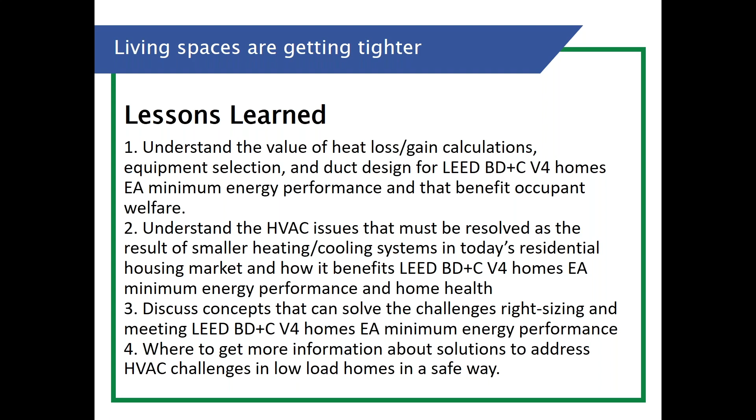I'll be your moderator. My name is Brett Little, and I am the executive director here at the nonprofit, the GreenHome Institute. And today we're going to be talking about how spaces are getting tighter and tighter and more efficient as codes progress, and how our HVAC sizing systems need to move along with that.

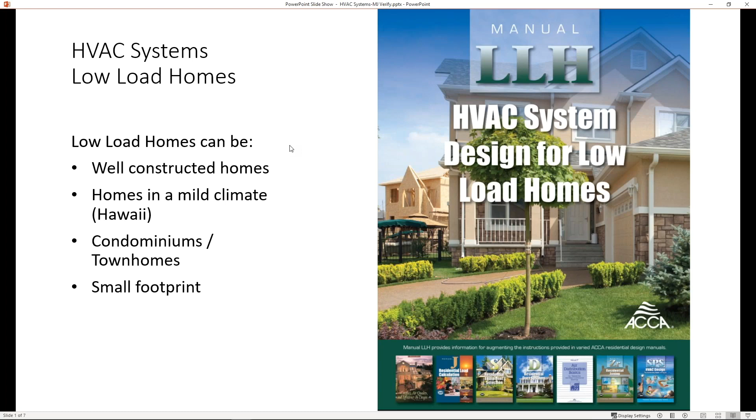How much insulation's in the house, and does it contribute to a tight dwelling or not? Same thing for the walls, doors, appliances, how many occupants are in the home. A lot of people model their homes with lots of occupants, and that's not quite right. Ventilation is becoming much more prevalent. Infiltration has to be factored in, of course. Duct losses also need to be considered when determining how much heat your dwelling is gaining or losing throughout the year.

So all those factors ultimately boil down to what size unit do I need to install. For a home that's about 3,000 square feet, for example, in the old days that might have been a 5-ton unit, and that would have been perfectly sized. But today, that same 3,000 square foot house might need a 2-ton system. So if you're sizing HVAC equipment based on old rules of thumb or old assumptions, you can get yourself in a world of hurt, because the equipment's not going to perform or interact with the dwelling the way the old systems did.

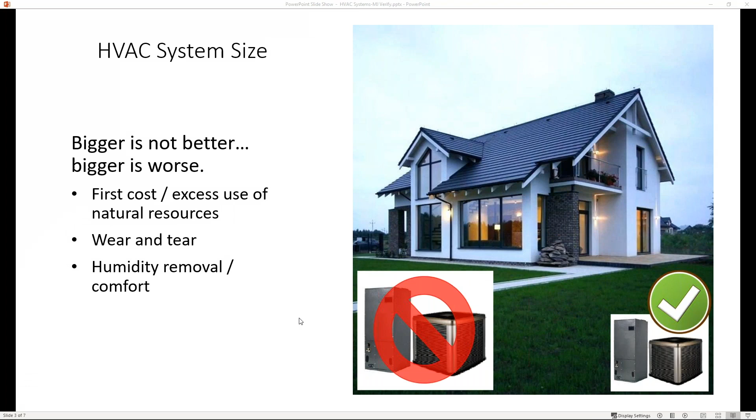One of the things that Brett and I were discussing getting ready for this was, what are some things that you could verify when it comes time to evaluate the HVAC system sizing? The basis for that is the Manual J load calculation. This is an eye chart. We're not going to stay here too long. I just wanted to touch on briefly, number one, the fact I'm using the J1 form and worksheet A, and those are standard forms from Manual J.

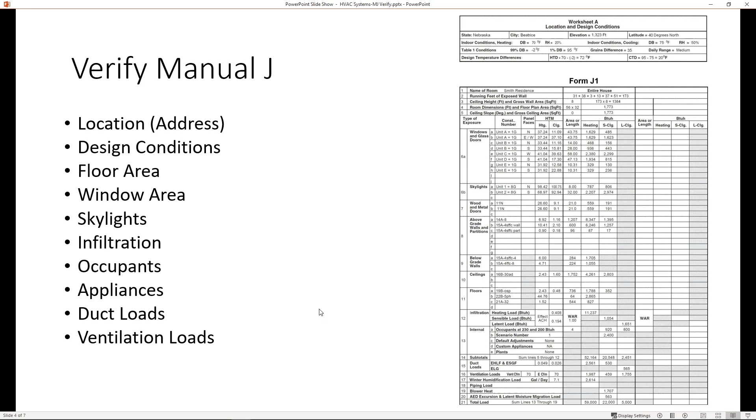There are a lot of other software products out there that produce a wide variety of reports. The information that we're going to discuss today should be available on those reports. You can have your contractor point out where that is and ask some questions along the way. So here's a list of some things that could be checked, and we're going to dive into that in a little more detail. The first thing is the location. The primary reason for that is this is one big contributing factor of the design, and that is the temperature associated with where you live.

So you may want to look at the report. Does it show your specific address? Does it say 123 Elm Street? Or at the very least, have we got the city and state right? These are using Manual J or ASHRAE weather stations. So it might be that you live in a suburb, and it may show a larger metropolitan area. Say instead of Frisco, Texas, it might show Dallas, maybe even Denton. But you need to make sure that what's represented is representative of where you live.

As I mentioned, design conditions: what were the design conditions that were used, both indoor, so here I've got a cooling design condition of 75 and a heating design condition of 70 degrees, as well as the outdoor. So 99% of the time, it's going to be minus 2 degrees Fahrenheit or warmer. And 1% of the time, it's going to be 95 degrees or hotter. Those two values are very important. They need to comply with what's prescribed in Manual J, as well as the humidity that's in the area.

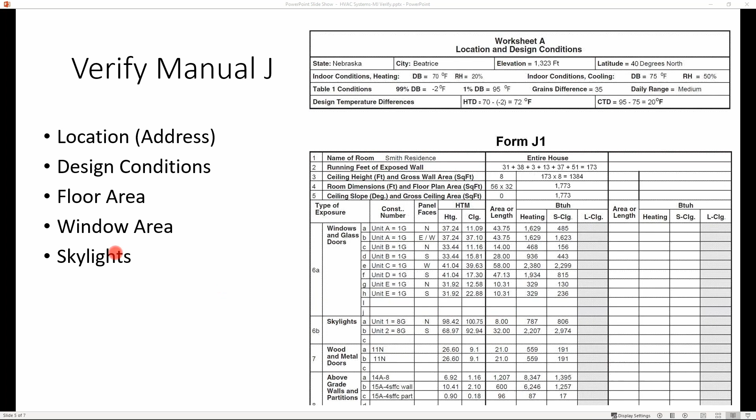Window area and orientation. So these are heat transfer multipliers, but the area of different windows in your home should add up to what your home's window area looks like. Skylights, same thing. If your house doesn't have about 40 square feet of skylights, then that may not be your house. So check that to ensure that your home is the one that's being properly represented.

Next, we look at a couple of other big ticket items. One of those is infiltration. And on the J1 form that's found right here, the important thing to note is this is the heating column, and these two columns are cooling capacity related. This is sensible, this is latent. This has to do with what you would see on a thermometer or your thermostat. This is hidden heat that's in the form of humidity, but it still needs to be accounted for.

So infiltration, you can see that 1/6 of the load for this home is in infiltration. So if you've got a tight home, ensure that that number is not that high. Same thing for cooling. 30% of the latent load is from air that's going to transfer in and out of the house just due to the force of wind and how leaky the home is. Wes, infiltration is just another term for air loss or air leakage, correct? Yes, that's what it is.

So the other item, occupants, if you've got a 3-bedroom house, it should be number of bedrooms plus 1. And then you can see that that contributes to the cooling load. Appliances, this is scenario number 1. This is a standard default value, typical for say a 3,000 square foot house. 2,400 BTUs were added to the house. If that number is different, it may be justifiable. But that number should either be 1,200 or 2,400 BTUs.

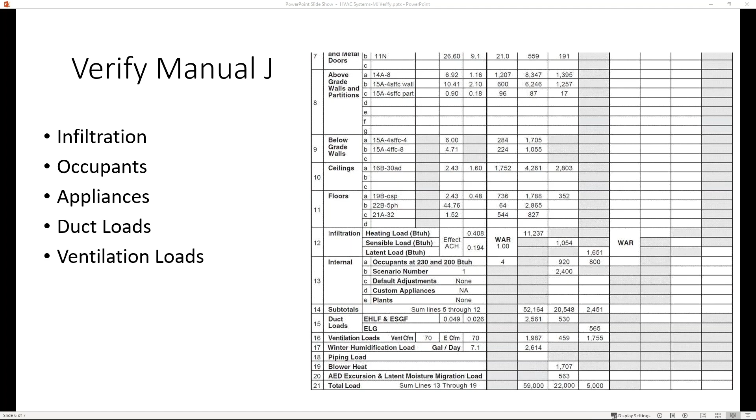Duct loads, if your ducts are in the conditioned space, then these loads should be 0. Again, these contribute pretty mightily to the totals for the home's heating and cooling requirements. And last but not least, ventilation. Is this the design ventilation that you were expecting? And if you want to dig into the weeds, we can get into the calculations for that as well. But those are some very quick, easy things that you as an owner or someone reviewing the HVAC system design, this first step, Manual J heat loss, heat gain calculations, can check. Is this what properly represents my home? Brett?

So I think the next part is Brett and I were going to have some interaction back and forth. He had some questions. I thought that would be a little more informative than just me droning on and on. Yeah, thanks. I was stuck on mute there.

So I wanted to just talk about the interplay or the conversation, especially in the early design stage, between the designer, architect, and HVAC design, as there's kind of iterative processes where the design changes. Is it relatively easy for HVAC, on the design side, to adjust these if things update within that design before construction starts?

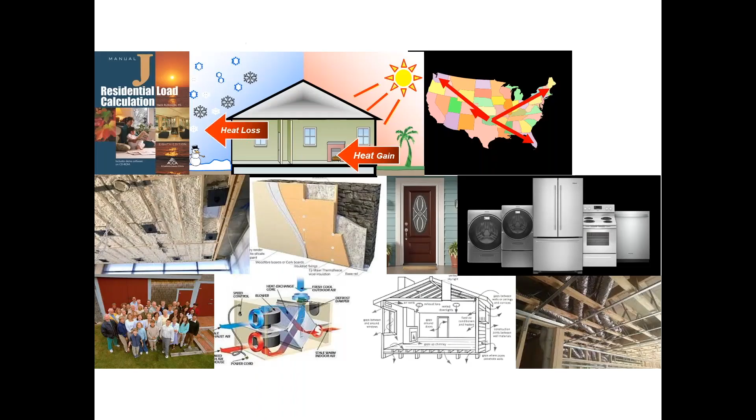Sure. So as soon as you have your design finalized, and we all know that things can change, that's when I would hand it off to the HVAC contractor. And it may be that things are still in flux, but the builder or the owner would like to get a rough idea of what it's going to take for the heating and cooling. So the contractor needs some basis for their estimate and for equipment size. So if they get the plans at an early stage and modifications are made, maybe windows are added or removed, window areas change, or the efficiency of that window changes, that's when that needs to be passed along.

And it's relatively easy to go into the software, apply a change, say we're going to remove a window, or we're going to add a window, or we're not using brand X windows anymore, we're using brand Y, and they have different U values or different solar heat gain coefficients. That information needs to be passed along so that can be factored in to their calculation.

Now, to the extent that I'm just changing from brand X to brand Y, and it's the same size window, and it's the same U value, and it's the same solar heat gain coefficient, that wouldn't need to be passed along. But if we're adding or removing or increasing the size or decreasing the size, or again changing those component values, then that needs to be passed along at the, I was going to say at the earliest opportunity.

I think once the decision's made, all right, this is the final, this is what we're going to go to construction with, that's when I would pass that along. And to the extent that there's an impact on the load and the equipment size went up or down, then that could be reflected in their proposal.

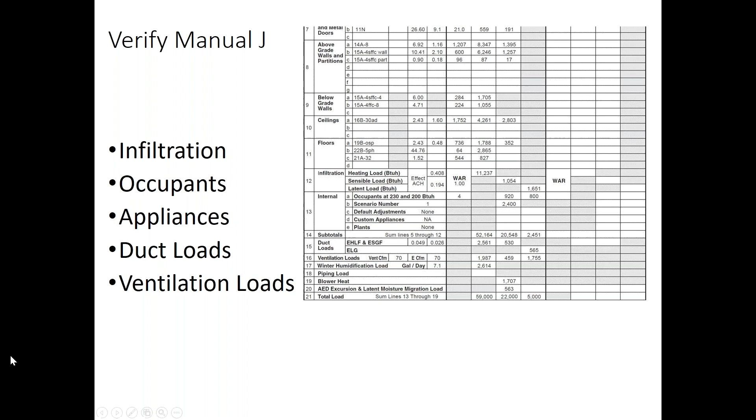And I can get into the weeds. The heat transfer multiplier is essentially a function of the temperature difference and the U value of the window. Oh, on that last slide, you're saying right over here. Yeah. But if you want to delve into the actual U values that were used, or the solar heat gain coefficient aspects that were used, you could talk to the contractor about that.

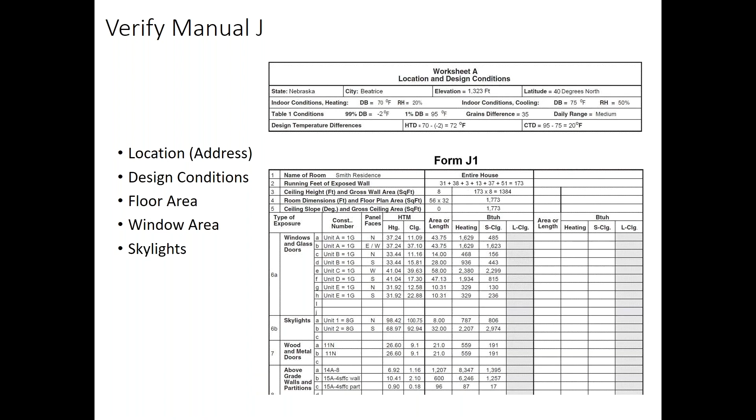All right. And I'm just looking at some of the questions that came in here: can you address the importance of having the room by room Manual J done versus the whole house? Sure. So I think that for equipment sizing, let's go back to the example of, we've got the design to a certain stage, and I need an estimate. It might be that the floor plan is finalized enough that I could do what's called a block load. So I'm just looking at the whole house as one big load.

And from that, I may determine, you know what, I've got an upstairs and downstairs. It might make sense to go with 2 systems. This is a conversation that can be had, or maybe it's a requirement that can be specified. But at the end of the day, I'm looking at huge sections of the home, and that's very good for helping establish equipment sizing. When it comes time to install the system, then room by room loads are invaluable,

because it's only when you examine the loads in one room that you can determine how much air to dump into that room in support of how many BTUs it needs to stay warm or stay cool. So for comfort in the home, room by room is the only way to go. To get a rough estimate for equipment sizing, a block load is perfect. Great.

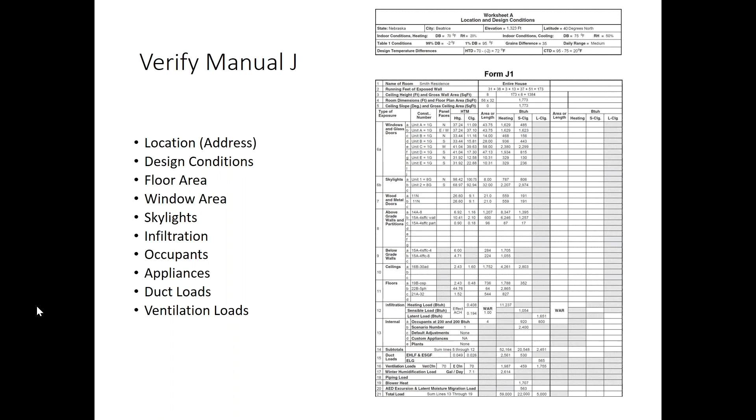So, just helping some folks out with some of the terms that come up when you're looking at these calculations. Can you just kind of take us through what they're going to see, what those mean, and how they compare, contrast, or translate?

Sure. So the first term, kBTUs per hour, is 1,000 BTUs, or British thermal units, that are used or need to be provided during an hour's time frame. That's what we use a lot of the time in the heating and cooling business. And that same term is presented again in a different format right below it, kBTUH, and then right below that, MBH: M is 1,000, B is BTUs, and H is an hour. So those first 3 terms are synonymous.

The bottom term, tonnage, comes from the old days when we'd take a chunk of ice and use that to provide cooling or refrigeration. And this is representative of about 12,000 BTUs per hour.

So a 5-ton system would be 5 times 12, about 60,000 BTUs per hour. In the cooling mode, it's heat that's extracted. In the heating mode, that's heat we need to add back to the space. So just for the tonnage, it's a conversion of these top 3. The top 3 are the same, and then the tonnage conversion is about 12,000 of these to 1, right? That's it. Yep.

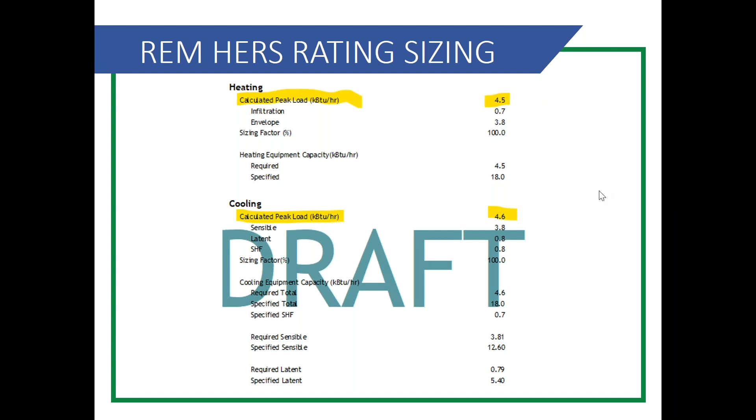I'm not quite sure where that question's going, but if we're trying to determine or approximate what the load is, I just prefer to use ACCA Manual J. Yeah, that makes sense if you want to get it right. That's fine.

And on that note, I don't know if you have any numbers or just anecdotal, but in reality, what percent of your conventional projects before HVAC is installed, whether new or existing, do you think is getting a formal Manual J done? Oh wow. I think more and more.

I couldn't give you a definitive number or percentage, but I believe it is a more widely accepted practice due to code adoption, and due to the realization that homes are performing differently. If I use the same old practices, there are consequences. Here on the East Coast, last year we had a very moist summer with a lot of rain, and a lot of homes had humidity issues, some due to the excessive rain.

All right, so I'm gonna look back at some of these comments and see what else is specific to the conversation. Somebody brought up the point that in order to meet Energy Star and get certification for any of those green programs, a proper room by room calc must be done one way or another. So thanks for reminding us of that. Let's see what other items were here. Oh yeah, so you take into consideration on Manual J the directions the windows face, but how about the walls?

No, I think that's a good question. I have to dig into that. I don't think I could answer that flat-footed right here.

I think, Brett, let me just run off at the mouth here for just a minute. Solar load on walls is typically not great. It's a lot more temperature difference driven. By the time the solar load gets through an east facing wall, the sun's around on the other side of the house, and by the time it reaches the other side of the house and it starts heating up the west side, it's starting to go down. Same thing with the south facing.